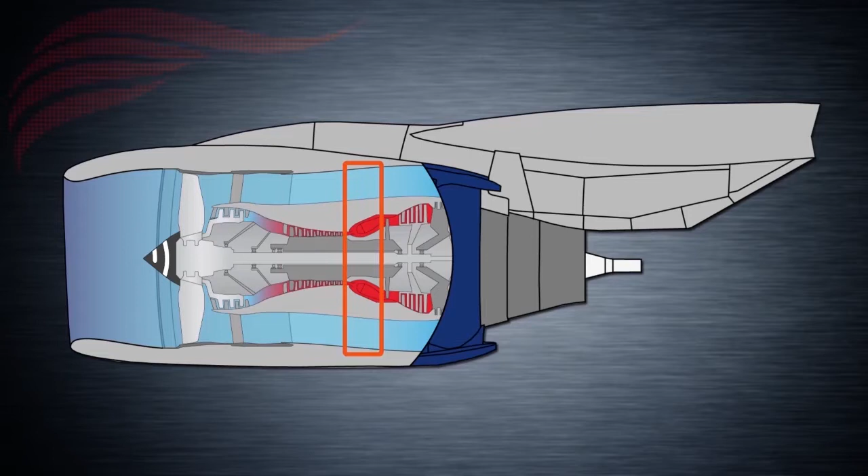To create the required forward-pushing force or thrust, each engine has the following main components: fan, booster or low-pressure compressor, high-pressure compressor, combustion chamber, high-pressure turbine, low-pressure turbine, and exhaust.

The fan has 24 fan blades that spin together counterclockwise to increase the speed of the air entering into the engine. A splitter divides this air into two types: primary airflow and secondary airflow.

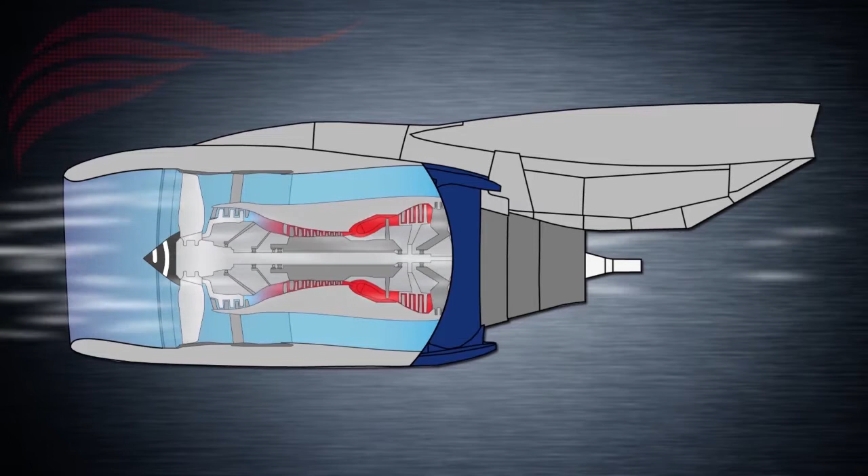The primary airflow, which is about 20% of the total air entering the engine, enters the engine core and goes through the rest of the components that we mentioned previously. The secondary airflow bypasses the engine assembly and is rushed out of the engine at a fast speed.

The ratio between secondary and primary airflows is known as bypass ratio. The CFM56-7B is a high bypass ratio engine. The higher the bypass ratio, the better fuel efficiency is achieved and a lower engine noise is produced.

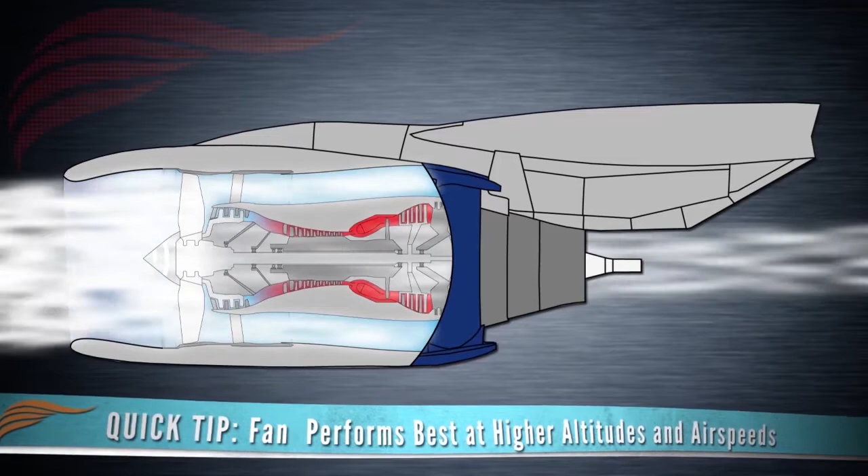The fan essentially works like a light aircraft propeller. However, it's designed to perform considerably better at higher altitudes and airspeeds.

After passing through the fan, the high and low pressure compressors compress the air to increase its pressure and temperature. The low pressure compressor has 3 stages of compression, whereas the high pressure compressor has 9 stages. After the air has passed through all 12 stages, its temperature is roughly 450 degrees Celsius.

Moving on, the combustion chamber takes this dense, compressed air from the compressors and also receives fuel from a series of fuel nozzles. These two elements are joined to create a fuel-air mixture that is burnt in order to make hot gases. At this point, the air-fuel mixture temperature will have increased to roughly 1700 degrees Celsius.

Because the hot gases in the combustion chamber carry so much thermal energy, they move further to the high-pressure turbine. This is a single-stage turbine that converts some of that thermal energy into mechanical energy in order to move the high-pressure compressors. The high-pressure turbine is linked to the high-pressure compressors with a shaft.

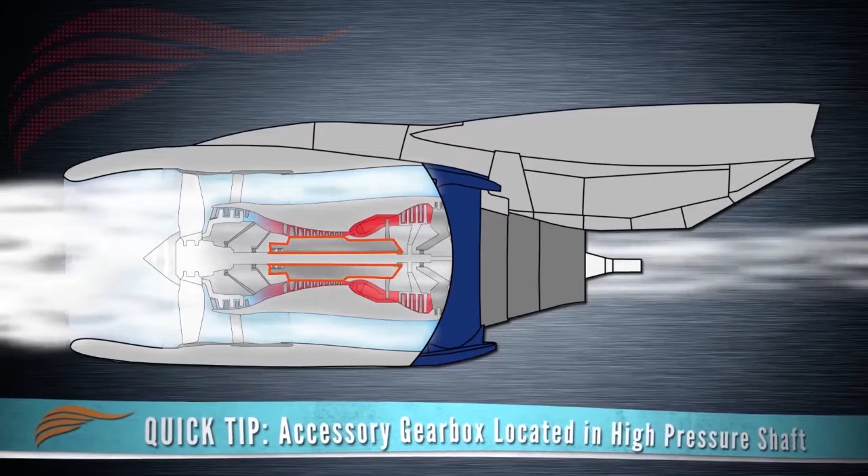The high-pressure shaft also turns an accessory gearbox that holds and operates the airplane and engine accessories. Some of these are the hydraulic pumps, sensors, oil filters, etc.

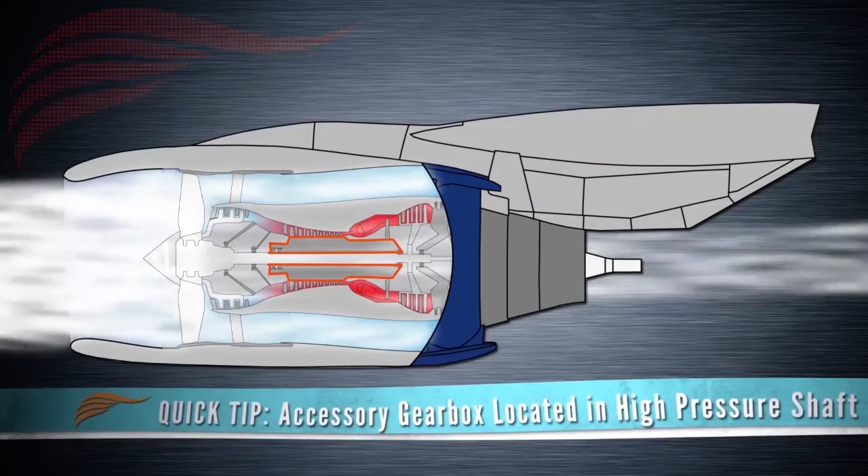The remaining thermal energy from the hot gases is also converted into mechanical energy by the low-pressure turbine. This turbine has 4 stages and moves the low-pressure compressors, or booster, and also turns the engine fan. The fan, booster, and low-pressure turbine are linked with a shaft that is mechanically independent from the high-pressure shaft we mentioned earlier.

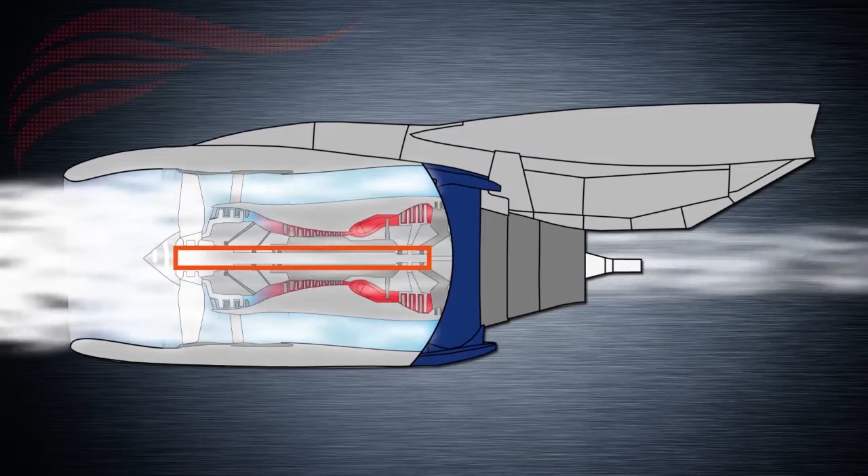A surrounding engine cowling protects all the engine components. This cowling has an aerodynamically smooth surface in order to minimize drag. Access doors are available in order to perform maintenance.

In addition, in the event of a foreign object being ingested into the machine, this cowling works to contain engine components if there is a breakup. Flying engine parts don't bode well for anything on the aircraft, including passengers.

To put things in simple terms, the secondary and primary bypass air work in conjunction to create thrust, or fast-moving air, that drives the aircraft forward. This works in a carefully synchronized mechanical harmony, considering fuel efficiency and low noise print along the way.

Worth mentioning at this point, there are several controls and indications associated to the engine system on the 737 NG. We'll be discussing these progressively throughout this lesson. However, the engine indicating system can be grouped into two categories: primary engine indications and secondary engine indications.

The primary engine indications are those of immediate importance to the flight crew. They are low pressure shaft speed, or N1, exhaust gas temperature, or EGT, fuel flow, fuel quantity per tank, total air temperature, and active thrust mode.

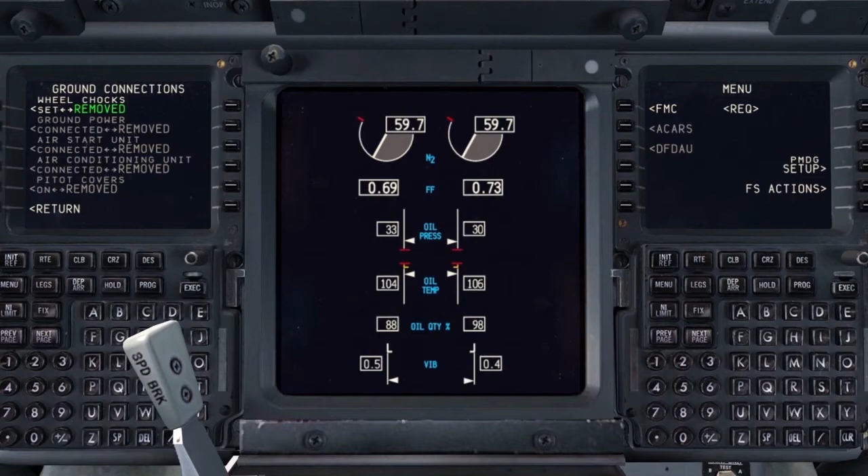We don't expect you to know what these are right now, as we'll be teaching them throughout this lesson and continually as we fly the aircraft. Much of what happens with the engines can be categorized as seeing is believing, so that's exactly what we'll do throughout your training.

Engines on the 737 ideally work with Jet A or Jet A1 fuel supplied from the wing tanks and center tank. This fuel is pressurized and is boosted into the engine system with booster fuel pumps.

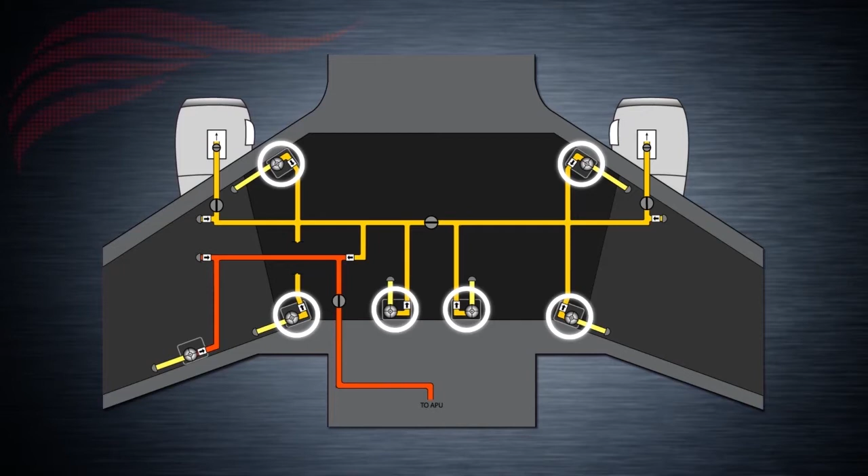Immediately outboard of each engine strut, there are engine fuel spar valves. These fuel spar valves permit fuel flow from the engine feed system towards the engine fuel supply systems. There is one fuel spar valve on each wing.

The fuel spar valves are controlled with the engine start levers located below the throttles on the control stand. There are two start levers, one for each engine. Start levers are used to start and shut down the related engine. Each start lever has the following positions.

Cutoff. This closes the fuel spar shutoff valve, prevents fuel from flowing into the engine fuel supply systems, and also de-energizes the engine ignition system. The ignition system will be discussed further along in this lesson.

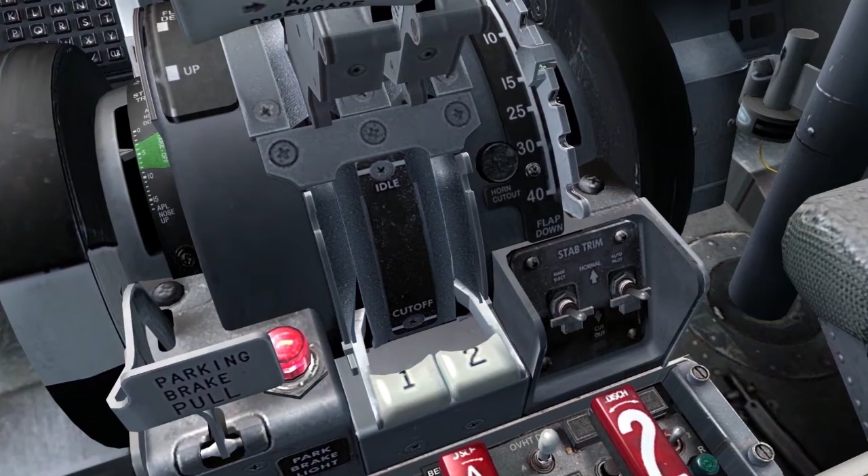Idle. This position electrically opens the fuel spar shutoff valve and also opens another engine-mounted fuel shutoff valve. When the start levers are placed in idle, the ignition system is also energized.

Moving on, once the fuel is passed through the fuel spar shutoff valves and is free to flow into the engines, it passes through four important stages: fuel pump first stage, fuel oil heat exchanging, fuel filtering, fuel pump second stage. Both stages of the fuel pumps are used to increase the fuel's metered pressure in order to deliver a constant high-pressure flow into the engine fuel system.

Following the fuel pumps, it's important to know about the fuel oil heat exchangers. In the 737 NG, fuel may be as cold as negative 43 degrees Celsius. Naturally, it takes a lot of energy to bring its temperature up to the whopping 1700 degrees Celsius that is achieved during the engine combustion process.

On the other hand, in order to lubricate moving parts, engines have oil. This oil gets very hot during operation and it must be cooled. The best solution to this problem is to exchange thermal energy between hot oil and cold fuel so that oil becomes colder and fuel becomes hotter.

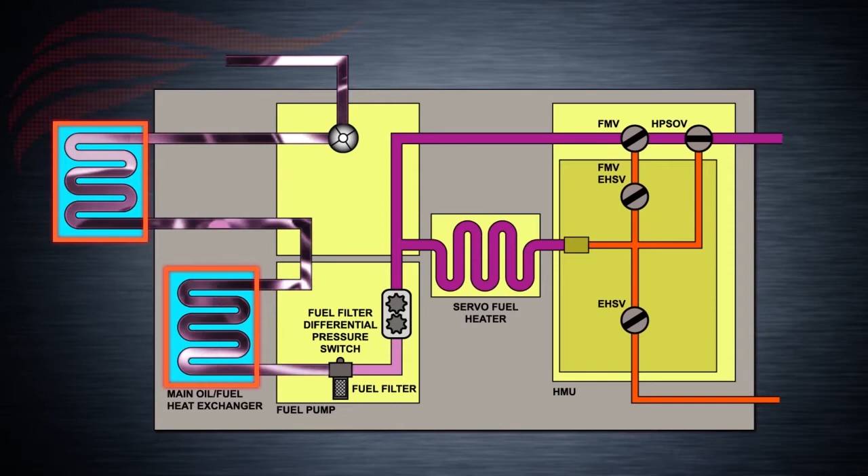Now, time for filtering. Any form of fuel contamination is bad. It makes combustion difficult and subsequently decreases the engine life. In some cases, when the fuel is excessively contaminated, it may even lead to an immediate engine failure.

To prevent this, fuel is filtered to minimize the presence of contaminants. If contamination clogs the filter, a bypass valve opens and fuel does not go through the filter before it continues towards the engine, ensuring that fuel flow is not sacrificed. It's better to have contaminated fuel temporarily than no fuel at all.

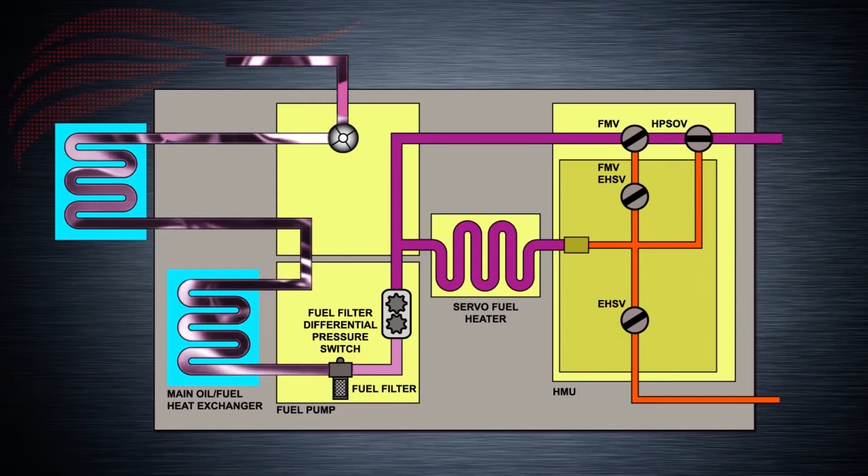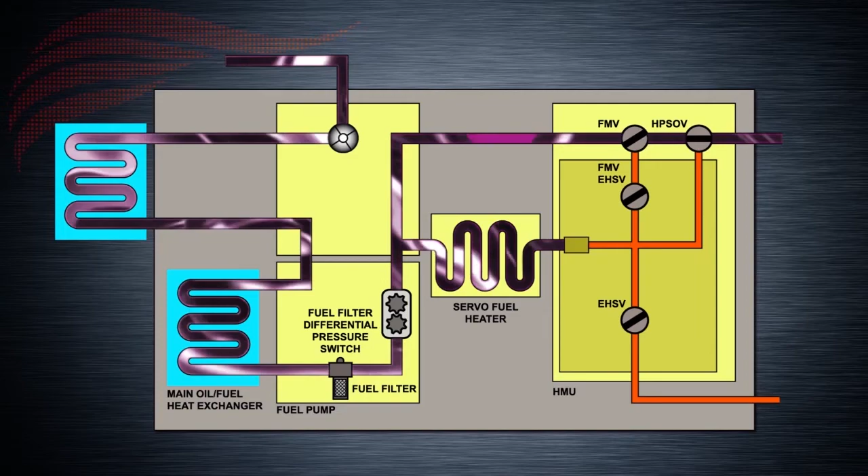Following all the components we've discussed, fuel finally goes through a hydromechanical unit. The HMU will not be covered in this lesson as it's discussed in the fuel system lesson. However, inside the HMU, fuel is metered and fuel flow is controlled by an electronic engine control, or EEC. The EEC uses analog and digital data to calculate the required engine fuel and controls output to operate the engine through the fuel supply that the HMU provides.

The mass flow of fuel that goes from these components into the fuel nozzles in the engine is measured by a transmitter that provides fuel flow indication. Fuel flow and fuel used are displayed as secondary engine indications in the display units.

There is a fuel flow switch in the center forward panel that has 3 positions. Reset shows fuel used, resets it to 0, and then displays fuel flow. Used shows fuel used since last reset and then displays fuel flow. Rate simply displays fuel flow to both engines.

You may be wondering, why is the electronic engine control so important? The EEC calculates thrust with ambient pressure, ambient temperature, and N1 speed. It senses the actual N1 compared to commanded N1 and makes the necessary change in fuel flow. The EEC is also in charge of keeping N2 and fuel flow readings within limits.